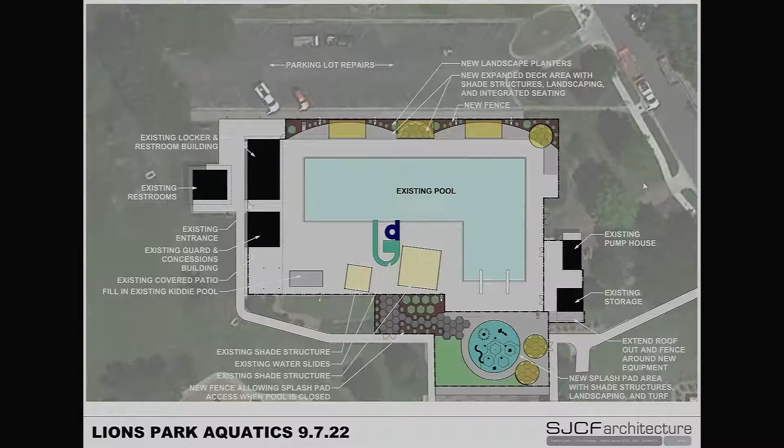Moving on to the south, that's a little bit different. We moved the splash pad to just outside the diving area, over where there's a sand volleyball pit now. There is still going to be a fence between the splash pad and the diving area, so we won't have little kids just running out there into the deep end.

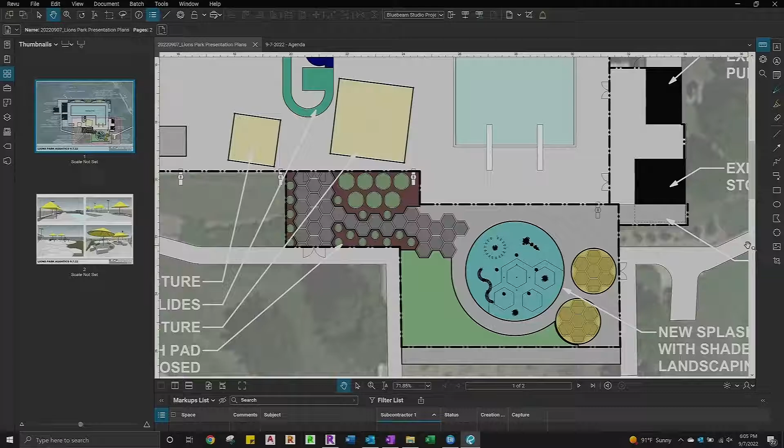We are going to keep that existing fence, which isn't shown on this diagram, but is to the right of that large shade structure that divides it from the diving area. So that fence will stay there.

And when I say keep it there, we're replacing it. It'll be replaced with the new vinyl covered fence that will be around the whole facility.

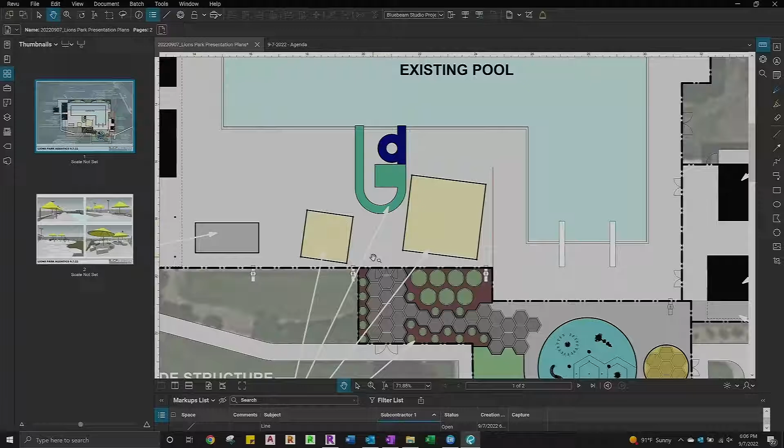The entrance to the splash pad will be just between those two yellow shade structures. They're existing. Thought that was a good idea. They come from Brent, actually.

Also, we'll have a gate from the south there. It's kind of hard to see off the existing sidewalk. And then we'll have one also over on the east side that takes advantage of the parking areas plus walking in from the neighborhood.

So this is taking over the volleyball area, a large portion of it.

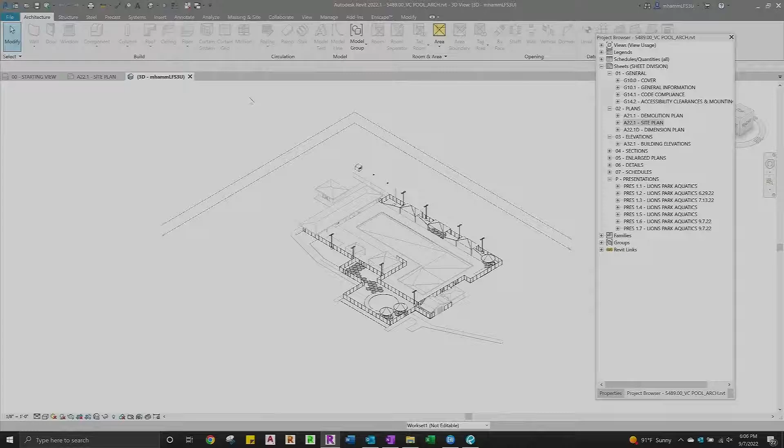The path to the splash pad will be kind of a playful hexagon shape. They kind of go off of your...

All that hornet nests. Yes. Anybody confirm the hornet nests are actually there? Yes. It's been confirmed many times. Also be on Facebook Warriors.

Very good. We will be maintaining ADA access in case anyone asks. They are going to be over 5 feet, a 5-foot path there.

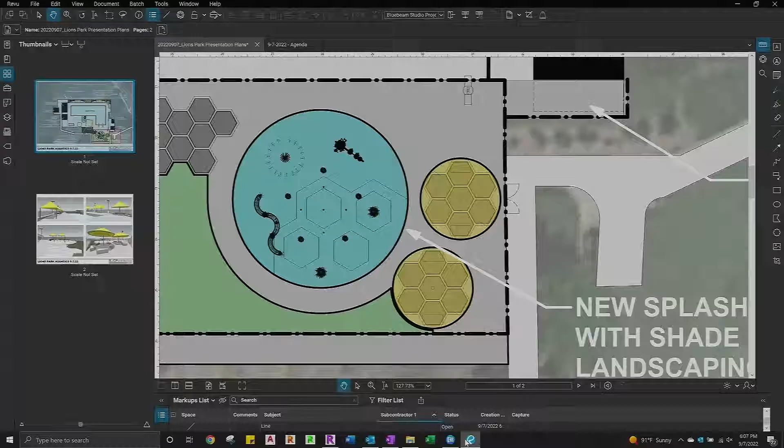Outside of that will be a rock infill area. We'll also have a mound turf area to the down and to the left of the splash pad. And then there's two circular gathering areas with shade structures off to the right.

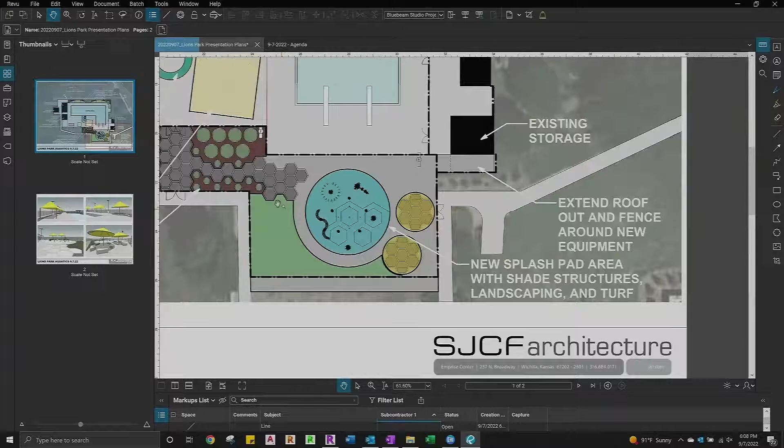Oh, this will also be, we can expand this later as we see fit. So once the pool gets filled in, that can be expanded easily into that area.

I think someone asked about the existing landscaping around there. I think we want to keep as much as we can. Now, construction is a little bit dirty and messy, so we may lose some of that, but try to go back with some simple type growing plants around there. So that picture is different than the one that was sent out here.

So this one's the current one, correct? Okay, this got changed yesterday, yep.

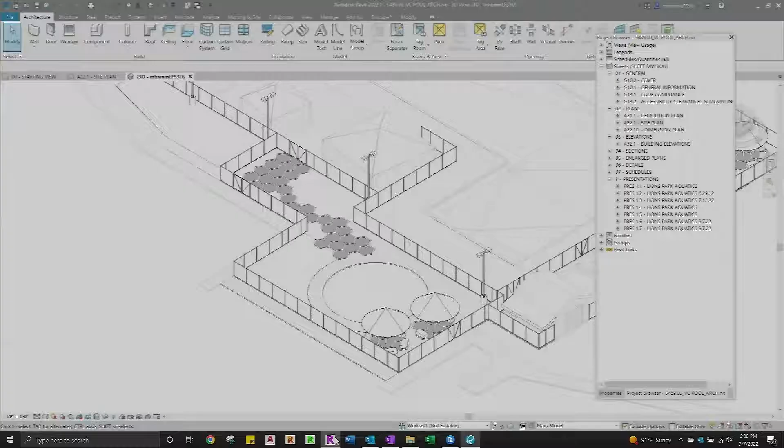Yeah, the one in the packet, if you look at that path, it's really neat and cool and everything, and also very long and very expensive. So we're looking at trying to scale that back a little bit, there's no reason to have it necessarily come from the existing kiddie pool area that's extra. That's quite a distance, and so we're trying to look at more cost-effective measures.

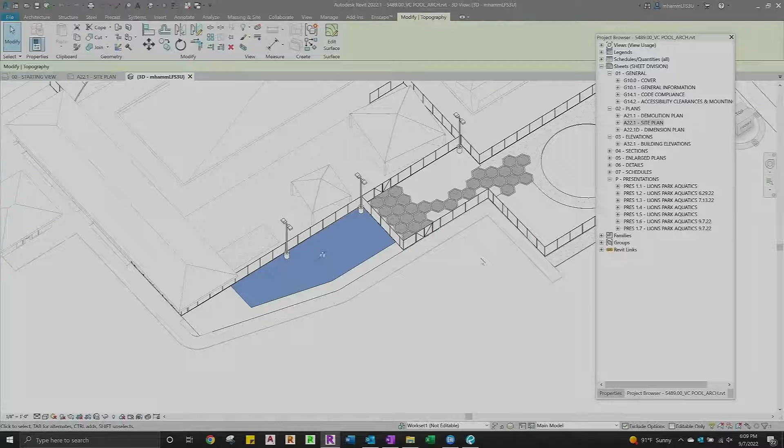Maybe sliding that over and then just having that in between the two shade structures that are existing. And then that also opens up the area, like we had visited with Blake, of maybe having that existing kiddie pool area available for party rentals, or if we add another shade structure or something there, that's more open space for that purpose.

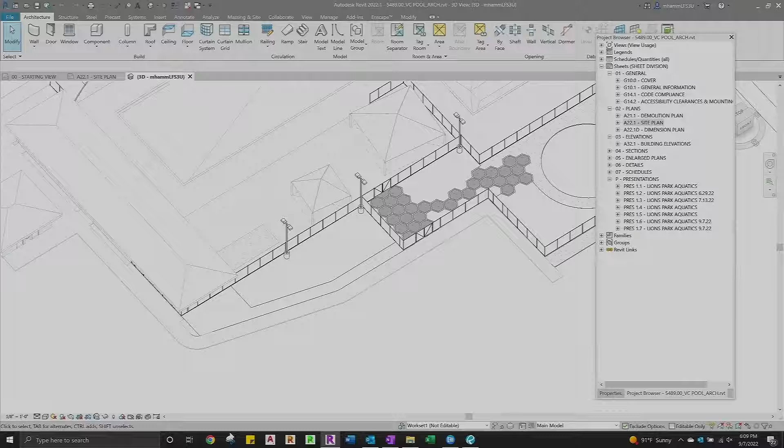Yeah. So it's being filled in? Yes, absolutely being filled in. And it was either way. This is not going to be deck space.

I have two other things to mention. We're going away from the south end. That does have some images, some render images of what that could look like.

Of course, no vegetation shown. It's just the construction elements. You can see the shade structure and kind of how that would look.

Both on the north side, this is again on the north side, right here. And the two bottom renderings are from the southern splash pad and path.

It certainly gives your pool a thoroughly modern and updated look. And both sides of the pool will be unrecognizable compared to today. I think the vinyl fencing will be coated so it'll be a real crisp and nice fence to go with these colorful shade structures. And it's a really good size facelift for the whole facility.

And I think it's got a cohesive design. If I was going to say anything about what we've done since the last time we got together, it's the fact that it has become more of a holistic design versus just a little bit here and a little bit there. We've balanced it and brought everything together into one good complex for, I think, a reasonable cost.

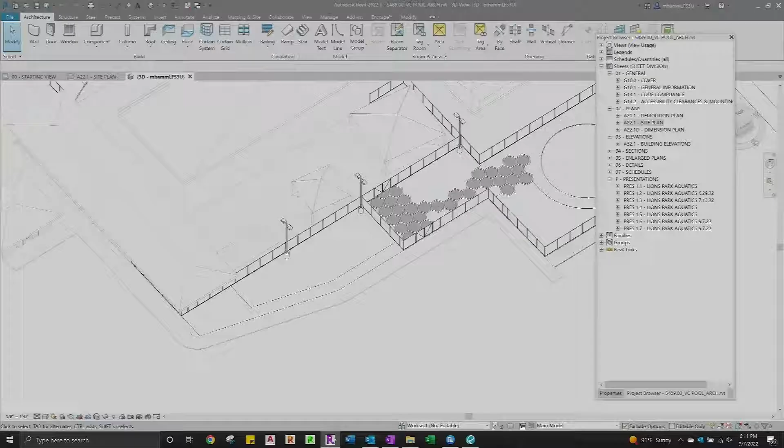Could you go back to the other slide? Could you zoom into each one of those panels a little bit for me? Sorry, it's kind of hard to. Yeah, sure. So keep in mind the colors on these shade structures.

That's just diagrammatic - they're probably not the final look. Certainly there's a richness that comes from adding some greenery in here.

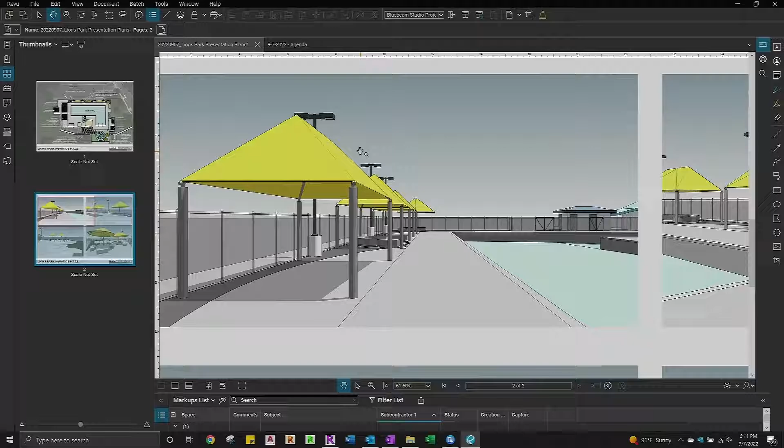We're working with the light pole locations to make sure that at night when you have these on, you're not having too much shade from the shade structure. We don't want to obscure the scope of the lighting with the shade structure. That's some of the last details we're working on. And the shade structures do exist outside of your existing pool deck, so we'll be getting into that.

We scrapped the mound with the turf - AstroTurf. We're going to have it down the south end with the splash pad, trying to focus the money on the area that gets the most use.

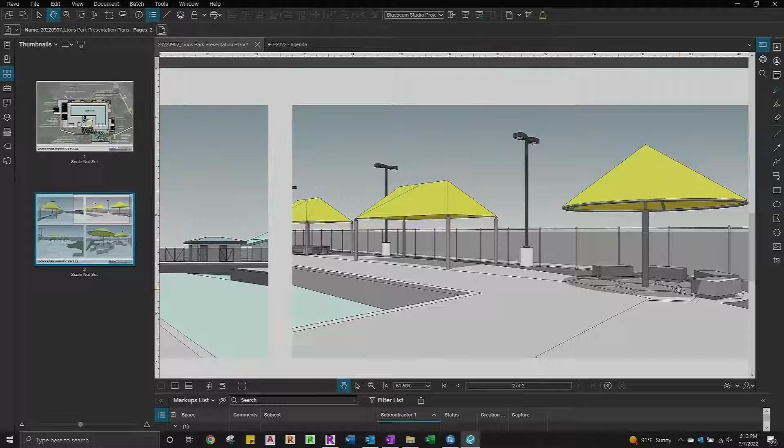Those shade structures - are they off the shelf, or those cone ones? Yeah, those cone ones. Both of them are - the rectangular and the circular shape. Those are standard. In fact, we already got engineered drawings from a supplier on those and gave them the shape.

What's the opinion on the stone benches down by the splash pad? Are they too many?

I like them. Being at the pool, there's always a lot of people looking for seats. I see a lot of adults just sitting on the ground, so I think more seating is better for parents. At our splash park at McLaughlin Park, we didn't have seating in the beginning, and adding some rock boulders similar to what you've got there was wonderful. We also put out some benches, but people were very appreciative of having something to sit on as opposed to just the ground. So yeah, I like it.

Soft seating? Is it soft seating, or is it all hard? It's stone - no cushions. No, it's just regular park benches and then the boulders.

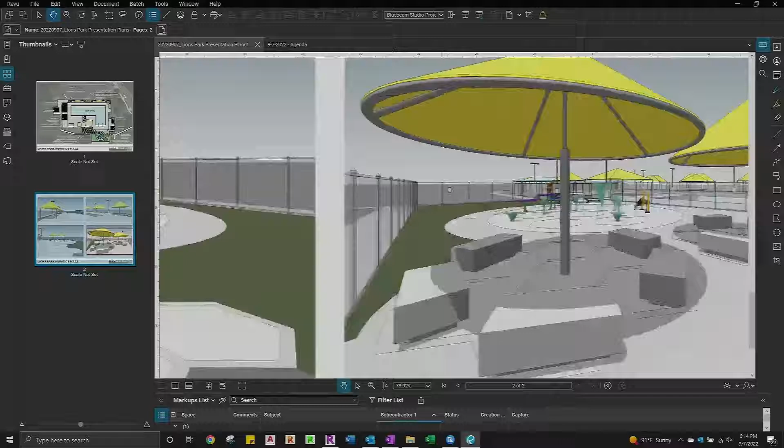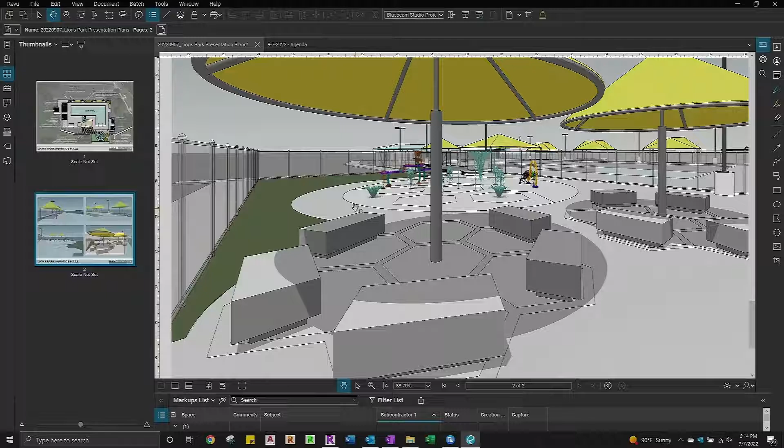What is the cost on the boulders versus putting just benches? I know those limestone benches - I think just one of those benches... a lot of it just depends on how much you... and just your comment on a standard bench, you're looking at 1,200, 1,200.

That's a reasonably priced powder coated one - and that's probably closer to the fully installed price because you've got a good sized piece of equipment to move those, locate them, and make sure they're level. There's a little bit on the install side, but you don't have to worry about the powder coating thing on that.

That's why they say these are long lasting for the entrances - they're vandalism resistant. I did have one comment on the limestone, because early in the process we talked about using them kind of in a natural setting.

Almost in a bowl, but in a rocky area, so it feels more part of the landscape. Whereas if you look at this rendering, this is a hardscape - it's kind of refined, the hexagons are angular, and there's a design to it. So I want to revisit the limestone here and see if there isn't something that does the same thing as the limestone, but isn't a big rough block sitting on the concrete.

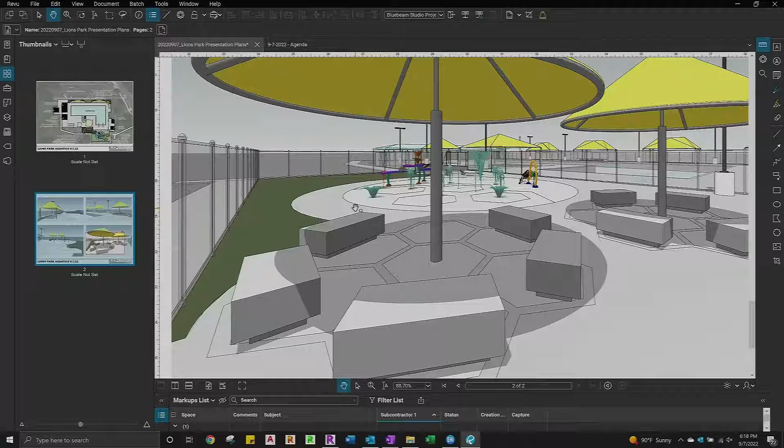Is there any question, anything we need to look at for this? I've got the model here. We can have Brian talk about the splash pad a little bit, or if you have any questions about the site.

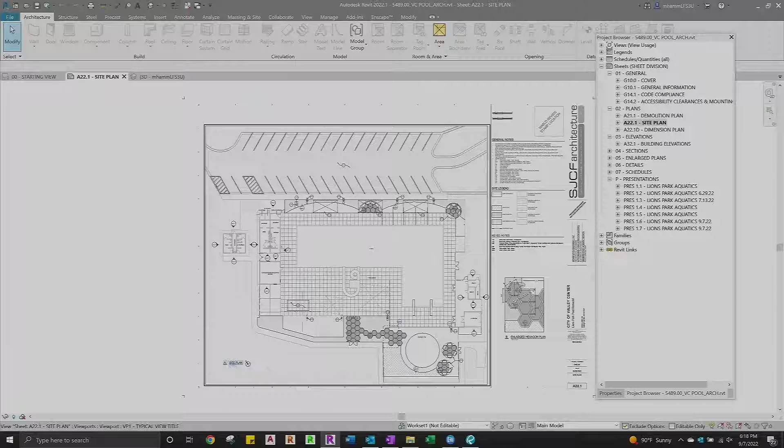I have a question - maybe you already talked about this and I missed it, but you'll be able to gain entry into the splash pad from the outside, right? And you'll be able to gain entry into it from the pool side too, right? So how do we make sure people don't just walk straight through? During the season, the outside gates are closed and the inside gates are open, so you have to go through the main way, get your admission, and then you have access to the splash pad.

The outside gates are open in the off season, so you can open the splash pad first, like the first of May, gates closed, people use the splash pad, then when the pool opens you switch - in season the splash pad and pool operate together. I just wanted to make sure it's just a switch operation. Thank you.

Or even depending upon the hours - if the pool's closing at 2pm or 5pm and the splash pad wants to be open until 9, like the McLaughlin one, we can always work with the rec and the pool staff on opening and locking the gates, leading into that. I'm incorporating that.

Anything else? Yes, I know when we talked about doing away with the baby pool, we talked about creating kind of a rental space over there, a divided area near where this entry sidewalk goes to the splash pad. How have you guys addressed that, or does it change yearly? That's what I wanted to hear - if it had been addressed, it's basically cut off from here now.

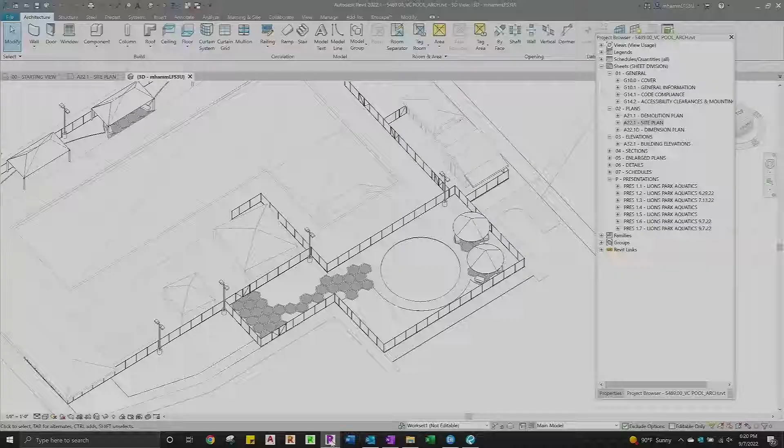Yeah, this is probably the best way to see it. Rick can catch me up, that's fine. Sorry, I think you missed the last minute change here from yesterday.

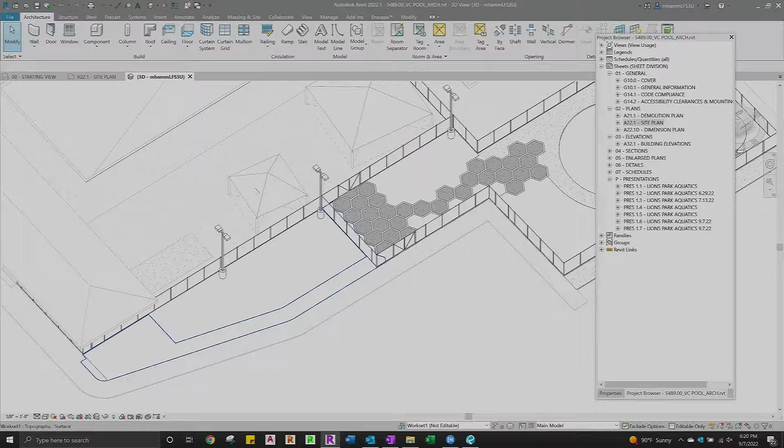Very good. But as far as a separate shade structure over where the kiddie pool was - there's your kiddie pool - that's not budgeted for anything there, but certainly could add something as an alternative, just to see what pricing would be and where we're at. The entire cost going to the splash pad is 88, so you could just pay close attention to that.

What would you do, Blake? Two smaller shade structures, say you can rent out the blue or the yellow - that's like the pool, I can't remember which one it was, but it was the last pool we went to, it had parties in the back. For operations you can pull multiple ideas - you could have at least one shade structure put in place, or two smaller ones with a couple tables. Really, the sky's the limit of what you want to do.

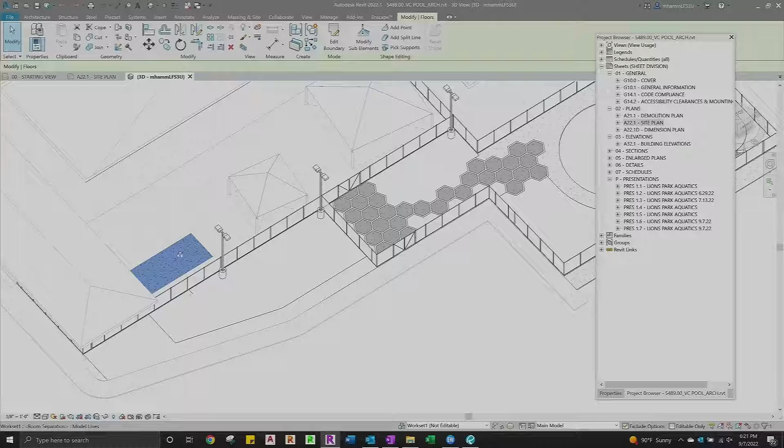Moving the wading pool area does give you more deck space for your concession area. We even talked about possibly, if you had something there, you could move the tables out and have real space underneath the roof, which could be your party space while the concession tables move out. So you really have a lot of operational options with that space open for you.

That'd be easier to block off if we remove that fence. Right now it feels like the concession stand is kind of hidden, it's not in the flow when you're standing in the pool, at least from my perspective. Because you've got a fence, and then a fence, and then a fence, and that's not great.

What are your thoughts on the existing fence between the kiddie pool and the big pool? When we were on site, we said let's just remove this fence, and then somebody said, well, there's a junction box, so I don't know how to work around that. So are you taking out the whole fence, not just around the kiddie pool but also in the concession stand area?

That's the question, we're not showing that fence there anymore. It certainly should be added back, but if you want to rent that out as a space, what's that going to look like?

Well, I mean, all the Wichita ones are open. You could just put something like cones on the tables or the area to say this is reserved for a party at 3, or is that typically how you did it?

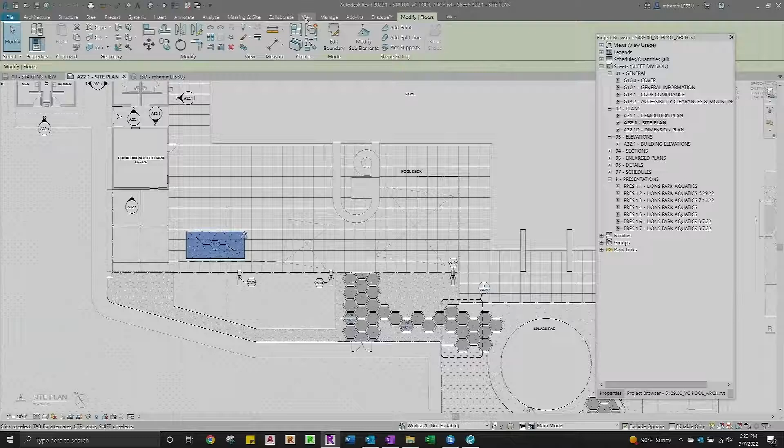There's reserved tables at that point, for reserving the table when the pool's open, you're guaranteed to have that space. Like a pool party, if you wanted that area during the day, it'd be at a lower cost than renting the whole pool out. Gotcha, so instead of spending, how much do they rent the pool for now?

100 for regular use. For a pool party, it depends, like 175 to 250. Yeah, 175 to 250, and that's expensive for a family. So if you can rent out a space for what was it, 25 or 50 bucks, $30, $50 depending on what you want to do, that's just another option. It's a great idea.

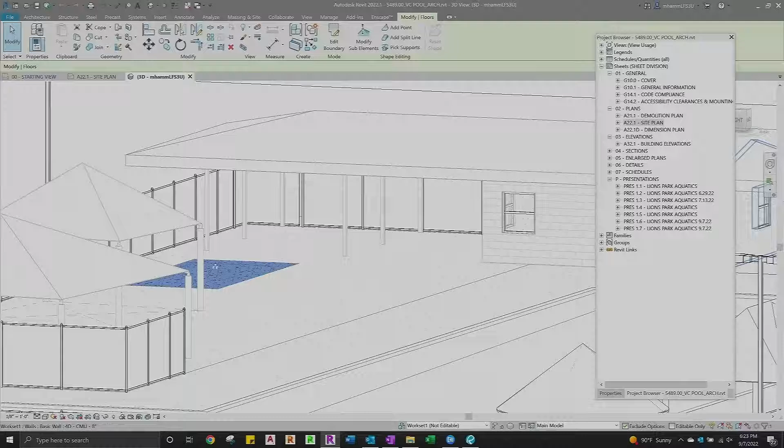By the way, this is a good view for you to see what we're proposing for the replacement of the board that covers up your concessions window. So we're going to propose doing a storefront with it.

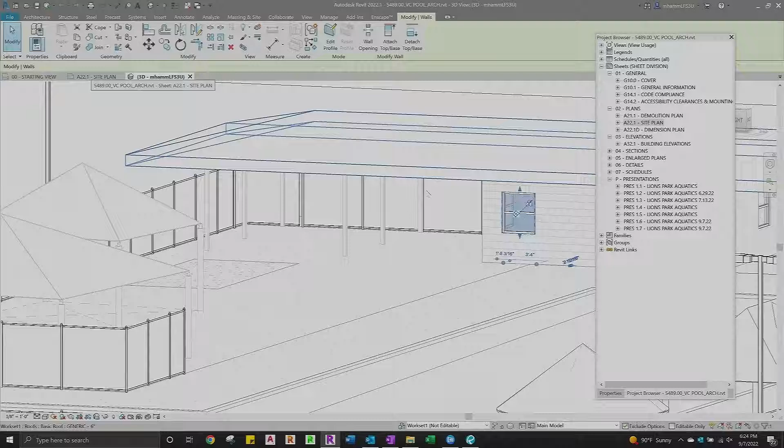That would be for all 3 windows. Secure. What size is it? Sorry, I can't see. Make sure Blake it's whatever size that is intended. It fills the existing opening. We're going to lower the sill of the window so that it's accessible, and we're just going to fill what's left.

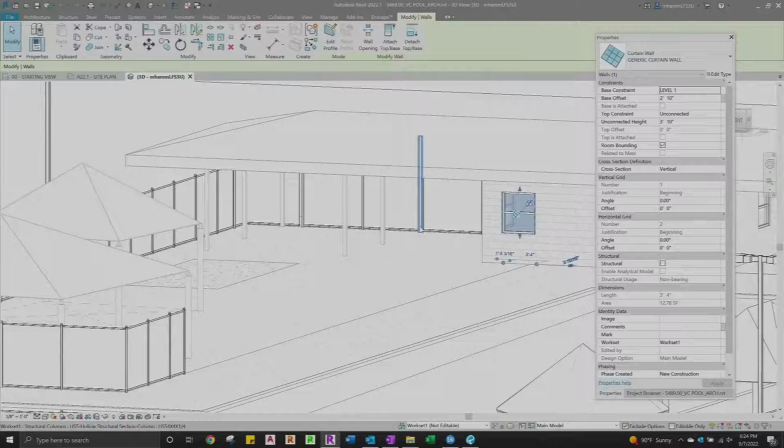The 3 windows, where's the other window? One around on the concessions side. Do they actually use that one though? That's where the kids usually hand out the hot dogs or pretzels, so that they're not backing up the main line.

Oh okay, yeah, not hard to see, but it's sort of the entrance, right? Yeah, inside there. That's the entrance, yeah, it's the pay window. There's your concession. Okay, and it helps with airflow through there since there's no AC.

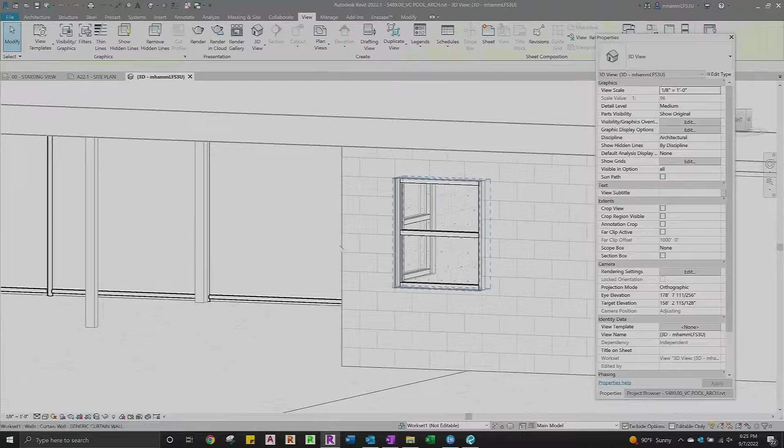Oh, I've never seen that thing open. Okay, not very often do they do it. Didn't know there even was one. I didn't even know it worked.

That looks fantastic. I drive like an expert. Yeah, it's not normally like this. Good job. I think having that all open just adds to the refreshed, revitalized feel. They just got to keep the inside clean now.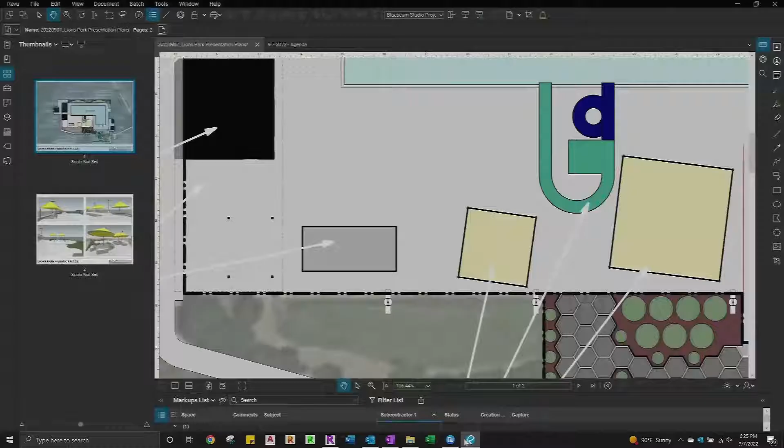They want AC too. They want AC. We'll give 'em a little window unit, we'll give them an AC, the one you plug into the wall, a fan. All right, well hey, 1960s version.

If there's not any major questions, I might have Brian talk us through the splash pad. I don't know, it's been a while since we looked at the equipment that's being used.

Just real quick on the windows, talk to me a little bit about what you're proposing there, materials-wise. Aluminum. I mean, are they glass, or are they going to be some sort of a glass break resistant material?

I saw teenagers moving these windows up and down, could see one of them. I'm not worried about the people working there, or people hopping the fence and breaking the windows and throwing rocks - it's the vandalism, trying to get in.

Yeah, I can see getting those fruit snacks too. Get them fruit snacks, that's right.

There's other ways to do this too. Gary and I talked about options like doing a hollow metal door in there - you just open the hollow metal door and it's open. The windows would be very nice, don't get me wrong, but I'm just thinking about what we have to deal with from the vandalism standpoint. There's a couple different windows - the single sash that raises up, and the slider that slides to the side, but that cuts your window in half. That's something I think we ought to visit a bit more.

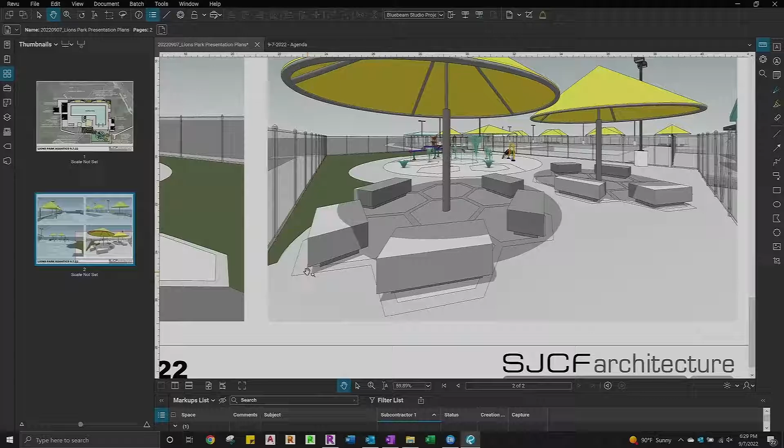Looking at some of the features on the splash pad site - it's going to be a mix, mostly ground sprays. There's a sensory table called the Cascade River, where kids can play with it and control the flow, see how water flows through the system. There's also the Luna system, a little archway on the other side with little flows that spin that kids can play with. Those are the more tactile interactive features, and the rest are just sprays that go up and provide water. It's a nice area for what we're looking for your clients - it'll give them that nice zero water area for kids to play in. I think it's a nice addition to the pool. Any questions on those features? There's sprays that come up, they feel good.

Are they different types of sprays? There's at least 3 different types - some will be like little bubblers, some come up just a few feet, and then there's one that's the big gusher you see. The big guys are in the back, you want to mix it up a little bit.

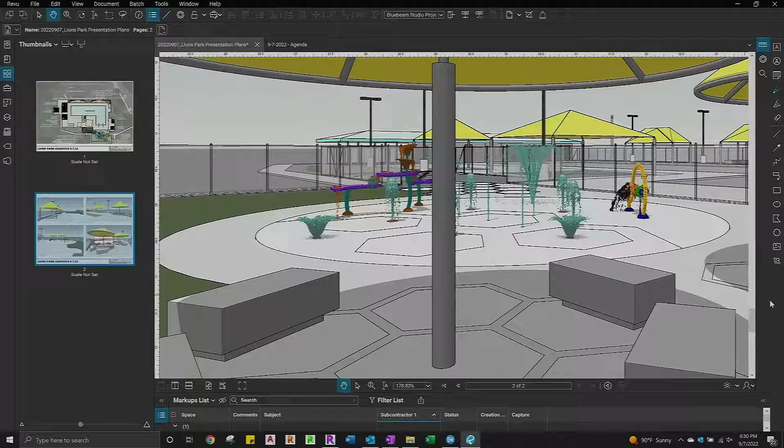How many total sprays and stuff? I'm trying to compare - how many do we have in McLaughlin? Just sprays and those things - we have 7 or 8 different stations. This one is currently at 12. They're working on the piping right now with the pumps, seeing what works with flow rates, and they're going to try to squeeze in 1 or 2 more here and there. They did take out the lights - we first talked about maybe lighted ones, but we swapped those out. They saved quite a bit of money on the different sprays, so we're able to do more sprays than what we were originally looking at, which is nice. That's great, yep, that's fantastic.

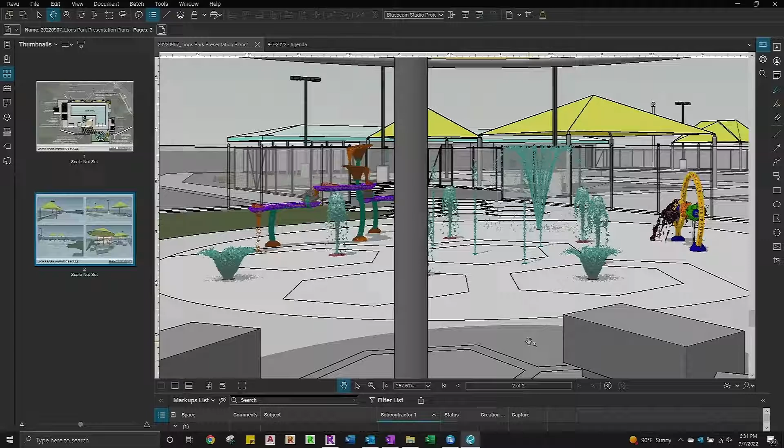Yeah, I'm going to show that real quick. Was working with Neil the other day.

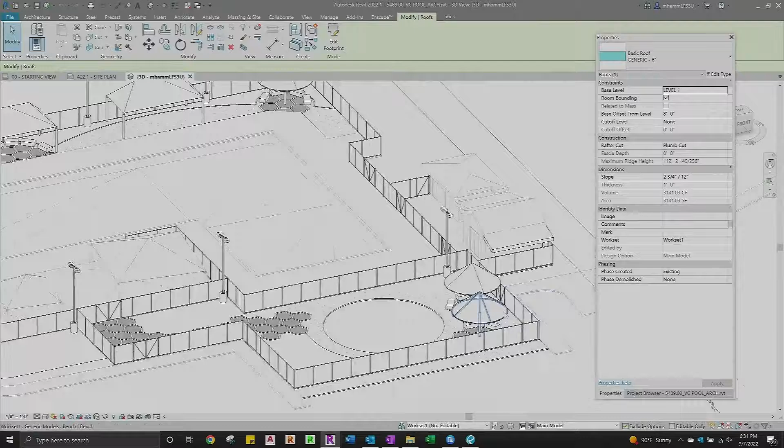Good news is we did some hydrostatic testing, Neil and his crew, and the pool itself is holding water. We don't really have a lot of concerns with the piping or with the basin. The gutter would still be questioned, but that's something we're going to be working on anyway. So the pool itself is holding water pretty well, which is really good news. We were afraid that we'd have to look into that.

We'll send it over to Todd to look at some issues we want to repair in the basin, but we're not having to rip out concrete and deck space and try to chase leaks and pipes. So that was good news.

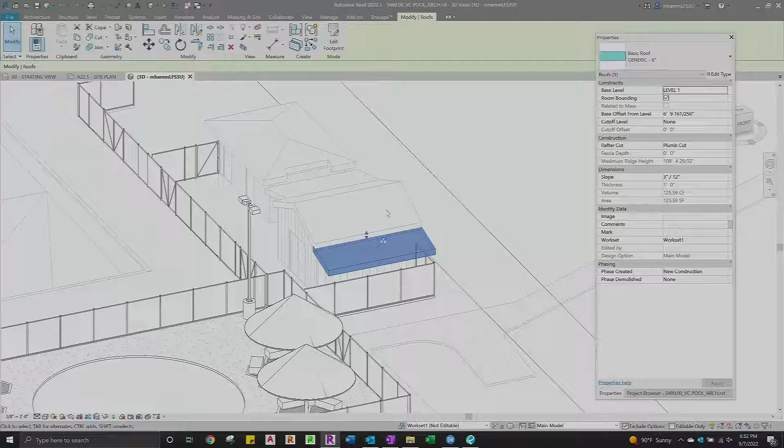We will be putting the splash pad mechanical systems under. We're going to extend the roof out of the storage shed and put a fence around that with slats, and that's where the filter and pumps will be housed. That way it's easy to access for staff to check on stuff when they need to, do backwashing, stuff like that. And it gives us a nice space - we're not taking up any of the storage area that's already there, and we're not going to try to fit more equipment into the existing mechanical area.

Yeah, it'll all be outside. Nice air flow. I think the pieces are starting to come together.

Sounds like you guys are happy with... Oh, thanks. Sounds like you guys are happy with the direction and kind of where we're landing with this.

So our plan is, like I said, that we'll finish up the details, finish up the engineering, get everything lined up and on sheets, and get it over to the guys at McCown Gordon. We're planning on doing that next week, so it's going to happen quick. And then they're going to run with that, and I think they've got some dates that might be of interest to you. Bring this over to you.

I know you're handing out prizes. Yeah,

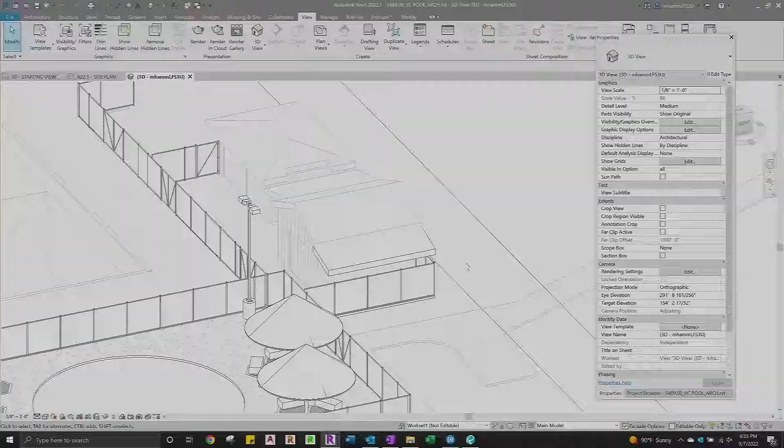So we were planning on, we got drawings on September 16th, which is Friday. We would have a 3-week bid process, get everything out to bid. We're thinking of having our bid day on October 11th. And then ready to review that meeting with you guys on October 19th. So the fall committee meeting.

Questions on that? Sounds great. I have a question.

Can you explain why bid date the 11th and then share with them on the 19th? What are you doing? Yeah, so we're vetting out our bids. Typically, every partner subcontractor bids, we're going through scoping everybody out line by line, making sure everybody's apples to apples, versus at the end of the day, we're giving you guys a guaranteed maximum price. So we want to make sure.

And when are we setting that guaranteed maximum price for this phase of the project? I would assume after our rec committee meeting on the 19th, the following week would be. That's probably more of a procedural question of who has the authority to execute that First Amendment - this committee, or if it's the council. Council. Okay, so then what we would do is the approval on the bids that were presented, prepare a GMP, and then council approval.